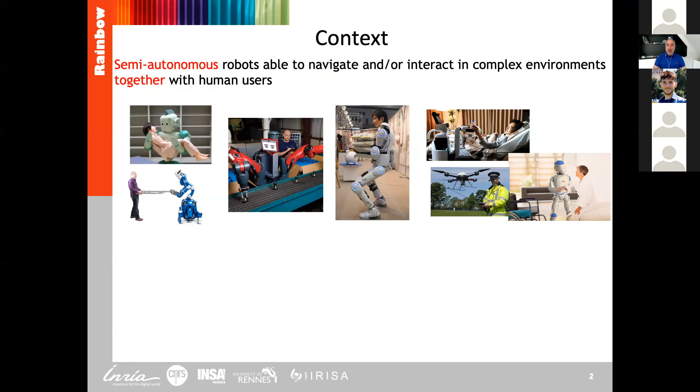So what I will talk about in this talk is a summary of the activities that we have been carrying on since, I would say, 10 years or so on the topics of shared control. So a little bit of context. So we want to have robots working together with humans for many reasons. So we can find really a lot of reasons if you want for why this is important. But for example, there are technological limitations.

So we all would like to have robots which are all capable and able to do everything on their own, but we are not there yet in many cases, as we all know. So we need the presence of human operators for helping in achieving a task in many situations which are not very well structured or predefined. Sometimes the robot needs to work together with a human because the task is such, for example, if they have to carry an object together.

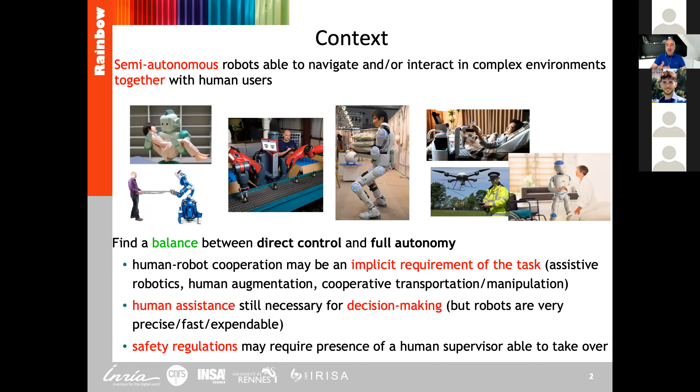Or also another point which is not considered every time, but I feel is still very important, is that there are many legal issues and safety regulations that prevent the use of autonomous robots all alone, for example, in public spaces. So you need to have a human supervisor there for controlling the situation. And so we could go on in this list, but because of all these reasons, it's important to study how to best interface humans with robots.

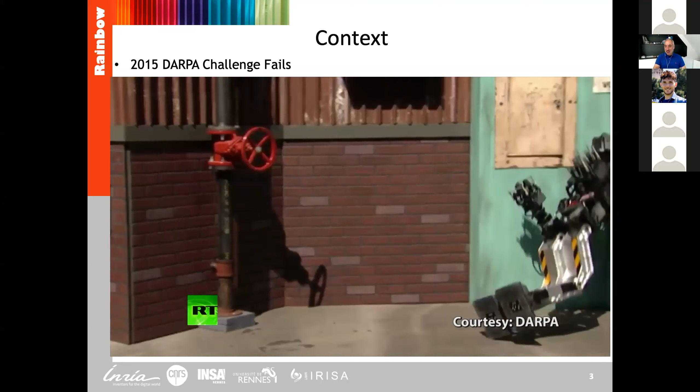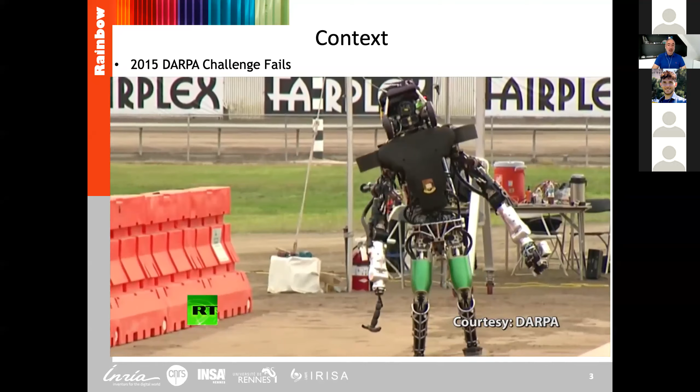And I guess everyone knows this video. So this is now a bit old, a 2015 video of fails of autonomous robots. Of course, this is a collection of the bad cases, but we can get a sense, at least in 2015, and I think that in 2020 the situation has not evolved so much from this time. Autonomy is not able to solve everything, especially in complex situations like humanoid robotics.

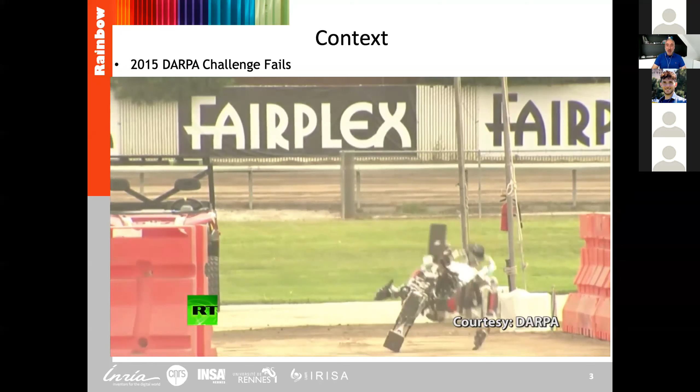And we try to place ourselves in the middle of this spectrum from, can you see the pointer of my mouse or not? Yes. Okay, yes. Okay, thanks.

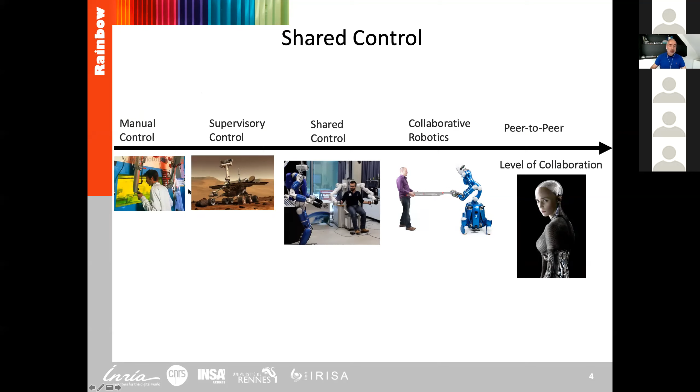So from manual control, in which an operator is in direct control of the robot. So for example, in this case, I think this is an example from the nuclear industry where an operator is controlling joint by joint a manipulator in the room. So we place ourselves in the middle. So the robot needs to have some autonomy because, of course, the operator cannot deal with everything by himself.

So a human operator can control, I don't know, maybe 2, 3, 4 degrees of freedom at most. We have some joysticks or devices, but then the mental load quickly becomes very, very heavy. So the robot needs to have autonomy for dealing with all the low-level aspects of the task that cannot be handled by the human operator. But the human operator is there and is controlling part of the task via a small set of degrees of freedom of inputs.

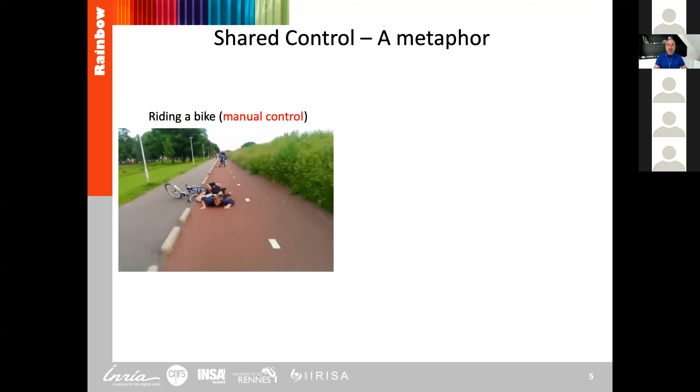Okay? So this is a metaphor that I didn't find myself. I picked this from a PhD student of mine, but I like it very much. So you can imagine manual control is like riding a bike. If you want to ride a bike, you have to be fully focused on riding the bike. Because if you try to do something else while you ride the bike, then the situation can become very, very bad very soon.

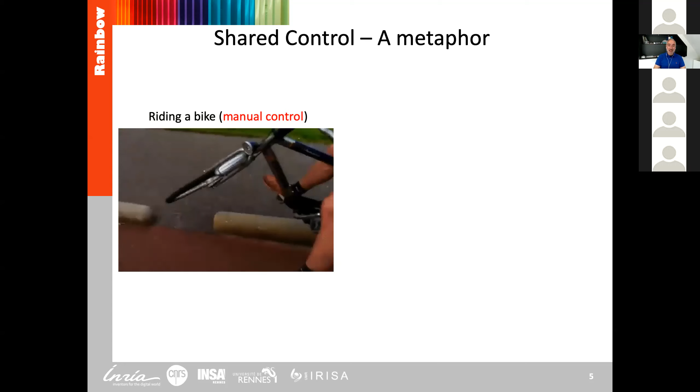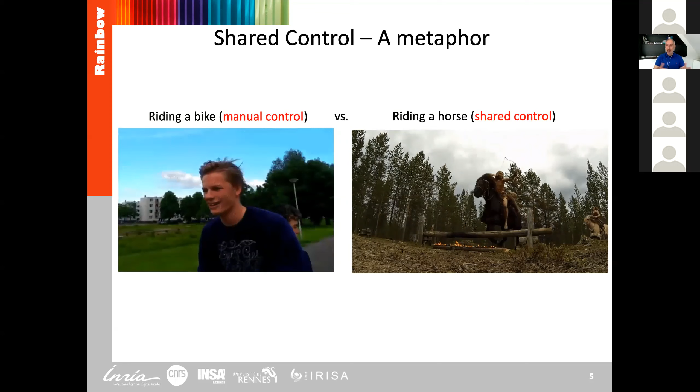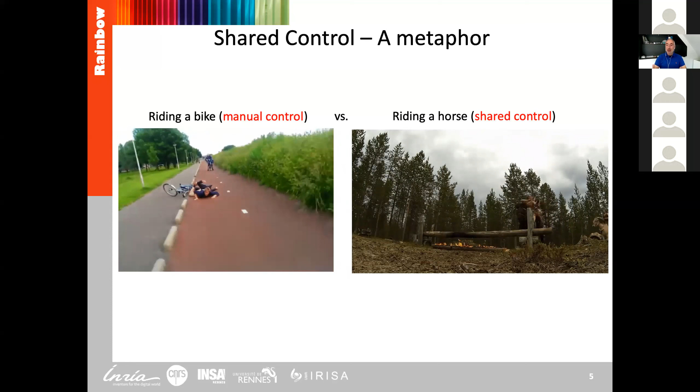While if you are riding a horse, the horse is a kind of shared control if you want, because a horse is a semi-autonomous system. So it's able to keep balance, to go along a predefined direction, to avoid obstacles, but then the operator is there and gives some kind of high-level commands via the reins. Okay? So we try to do the second example, of course.

So the main philosophy that we have been using in our work, which I think is shared by almost all of us, is to design forward and backward interfaces between the operator and the robot, which can be either singular or plural. So we can address either single robot or multiple robots.

So the forward interface is how to map few human commands to the many DoFs of the robots. And this is the part where, let's say, we engineers have to do some work. So how to find this mapping between maybe 2, 3 degrees of freedom and many, 10, 20 degrees of freedom of the robots under control is a problem. It's one of the challenges. So this part needs some work.

And then we also have the backward interface. So the robot is doing a task, and it has to inform the operator about what is going on. And so the operator typically is controlling the robot using a device and having some feedback, for example, visual feedback and force feedback, haptic feedback. These are the typical situations.

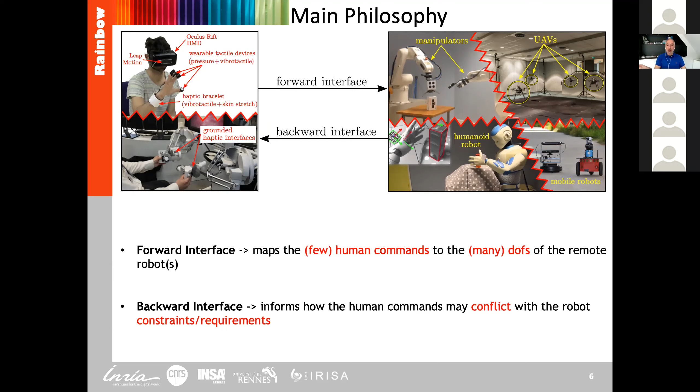And so the robot has many constraints. It's evolving in a complex environment, so it has to send back information to the operator, but again, this information has to be compressed somehow. It cannot inform about everything because the operator would very quickly lose sight of what's going on. So this backward interface is like the inverse mapping somehow of the forward interface. It has to compress what's happening to the robot to the few channels, to the few inputs available to the human operator.

So just a quick sketch. This is a generic sketch of how we approach this kind of problems. It's generic in the sense that in every situation, of course, this sketch will be adapted to the situation. So it has to be taken as a generic overview. So we have an input device, a master device. In general, we use force feedback devices. So we model the device as a typical second-order mechanical system with control torques and the human input forces.

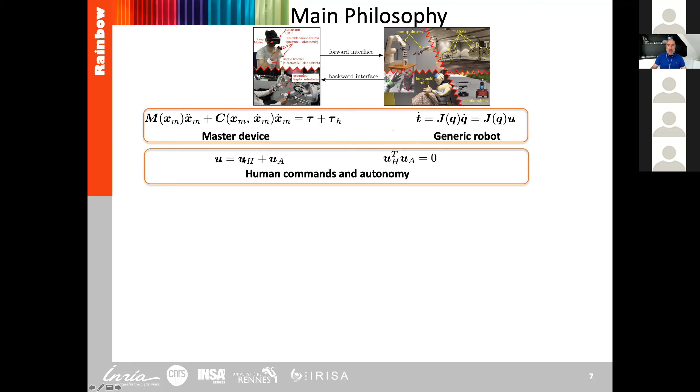And then the robot is a nonlinear system. So whatever, it's a generic nonlinear system. In this case, I modeled it as a first-order system, but you can also imagine it as a second-order system or more complex system. So the robot has some inputs, U, and these inputs are divided into a human command and an autonomous command, with some orthogonality properties among these two components. So we would like to have the human commands orthogonal to the autonomous commands according to some metric.

Now, in this example, the metric is just the Euclidean metric, but you can imagine using any kind of metric of interest. And this orthogonality is important because in general, we don't want to have the human commands interfering with autonomy and vice versa. Then a hard part in general in solving this kind of problems is to encode. So the robot has many constraints, many requirements. For example, the joint limits, singularities, obstacle avoidance, and requirements such as reaching a task, keeping balance, and so forth.

So all these kinds of constraints and requirements, in this way of approaching this problem, need to eventually become encoded into some kind of cost function. Now, this cost function in this plot is very simple, but in practice, this cost function can be arbitrarily complex. So a lot of work, a lot of engineering work goes into the design of this cost function, which can be very complex because the constraints or the requirements can be very complex.

Then once we have the cost function, another step that we engineers have to do is to design the forward interface. So how to map the few degrees of freedom on the haptic device, on the master device, to the human commands. And this mapping is done via this matrix QF, which is in general a rectangular high matrix. So few human commands xm or ẋm, depending on whether the human is controlling in position or velocity, and many robot commands UH.

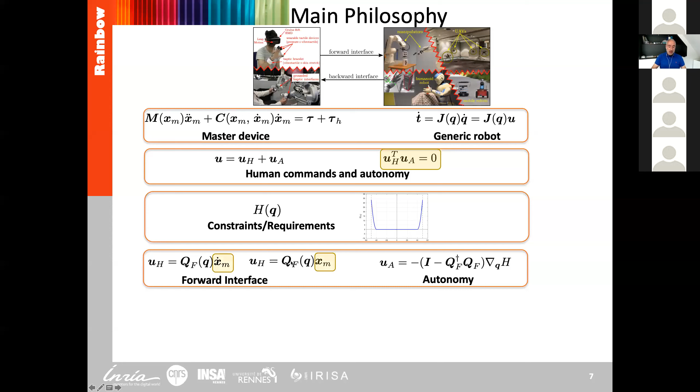Then once this is chosen, basically what the autonomy tries to do is to minimize the cost function H in the null space of this mapping. So this is the orthogonality property that I was talking about before. So the autonomy tries to do what it can for minimizing H while not interfering with what the human is commanding. Okay?

And then for the backward interface, basically the autonomy is optimizing H in the null space of the forward interface. And then there is one part left, of course, from this projection, the part which would be in the space of the forward interface, which is this part. This is basically how the autonomy would like to move the human commands for optimizing H. And this is given back as a force λ to the human operator.

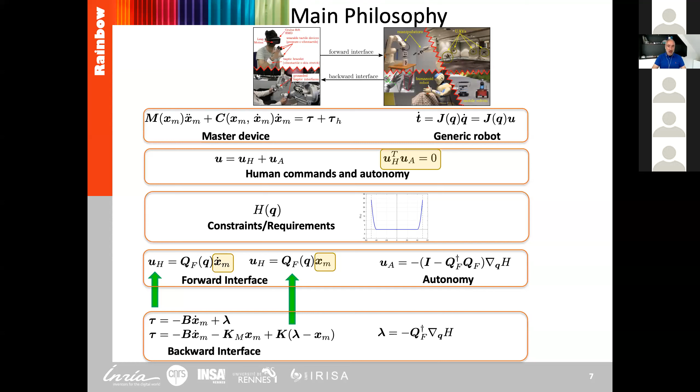Again, in this way, if the operator is controlling in velocity, or in this way, it's a spring if the operator is controlling in position. Okay? So this is a general sketch, again, of how we approach this kind of problems. Then we use these ideas in many different contexts: flying robots, single or multiple, and telemanipulation.

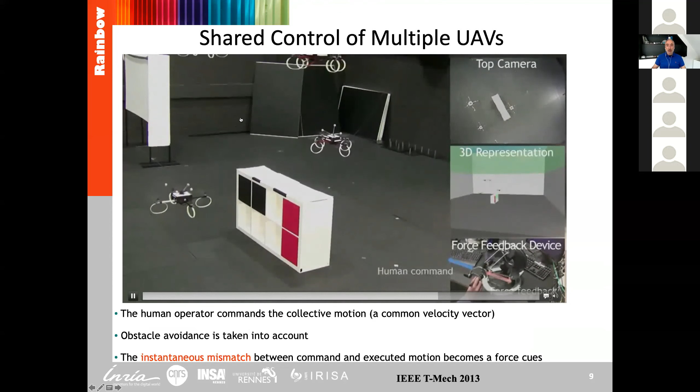So this is just a collection of some, by now, old videos about early works on this topic. In this case, an operator via a haptic device was controlling a group of robots that needed to keep a formation, a geometric formation, while avoiding obstacles. And the operator was commanding the velocity of the barycenter of the formation, and it was receiving a force which was basically representative of the repulsive action of the obstacle.

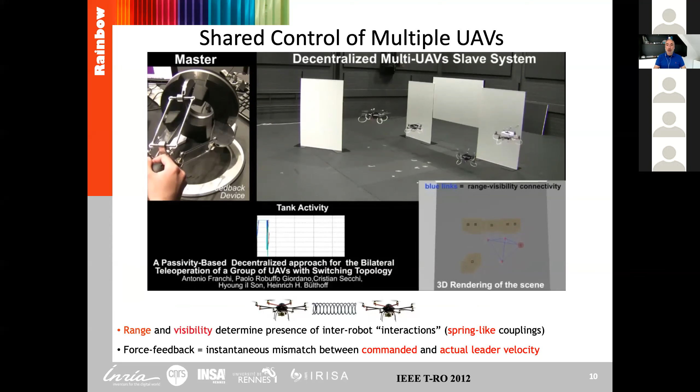In this case, the operator was controlling one leader robot, this one, while the other robots were following the leader robot via virtual spring-like couplings. And the operator was feeling basically a force proportional to the difference, the mismatch between the commanded velocity and the actual velocity of the leader. And the leader could have a velocity different from the commanded one because, for example, it could be dragged by the other robots which are following, or it could feel presence of the obstacles, so the repulsive action of the obstacles. We will also complexify this idea by encoding more complex constraints.

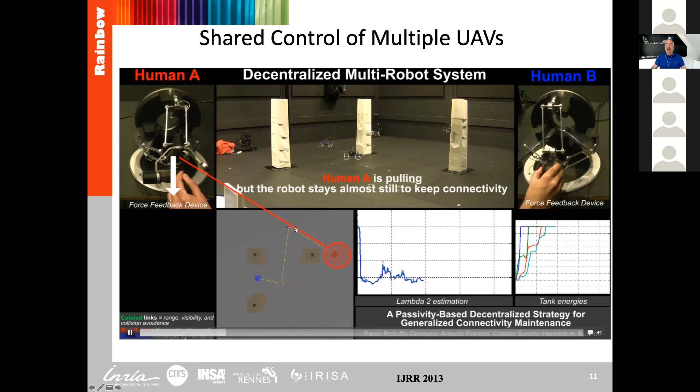So in this case, the situation is quite similar, but there is an additional constraint, which is a much more complicated constraint, if you want, that the group needs to keep connectivity of the graph at all times. So the graph can never become disconnected. So if the operator tries to move the leader in a direction, like in this case, where the graph would become disconnected, then the force feedback is informing him that this is not a good direction to move, and he should wait while the other robots reconfigure for not disconnecting the group.

And finally, we also use another approach that I like a lot, which is basically a trajectory-based shared control, if you want. So what happens in this case is that the operator is not controlling the instantaneous velocity of the robot, but the robot needs to follow a trajectory. So because of the task, the robot needs to, for example, cover an area and it has to follow a trajectory. And the operator can control some properties of this trajectory. In this case, for example, it can control the position of the barycenter, the planar orientation, and the expansion of the trajectory. And there are some constraints, obstacles.

For example, in this case, the robot needs to avoid obstacles. And the trajectory is modified by the robot, but ahead of time. So if there is an obstacle that could be hit, I don't know, in 5 seconds, the trajectory is autonomously modified by the robot in order to avoid the obstacle in 5 seconds. The nice point is that the operator receives a feedback, a force feedback, which is informative of what will happen in the future.

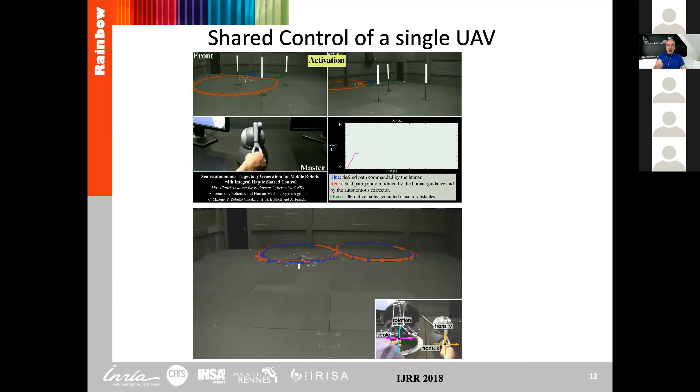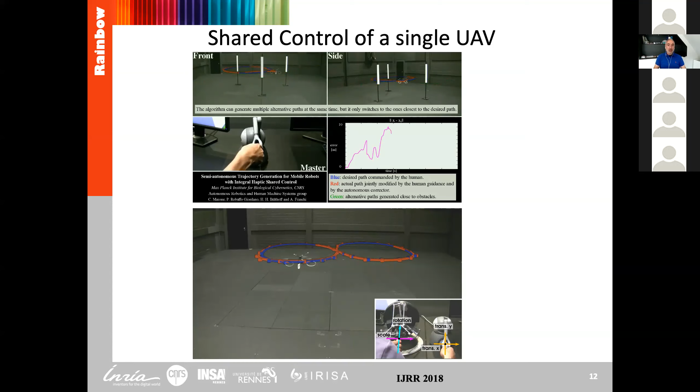So to explain it easily, if the operator tries to move the barycenter to the right, and moving to the right means that in 5 seconds the robot will hit an obstacle, then the force feedback tells the operator don't move to the right, because otherwise in 5 seconds the obstacle will be hit, and maybe it's better to move the path, I don't know, to the front or in another direction. So it's a kind of predictive force feedback, if you want, that informs about what will happen in the near future. And I think this approach has a lot of potential, especially for complex situations.

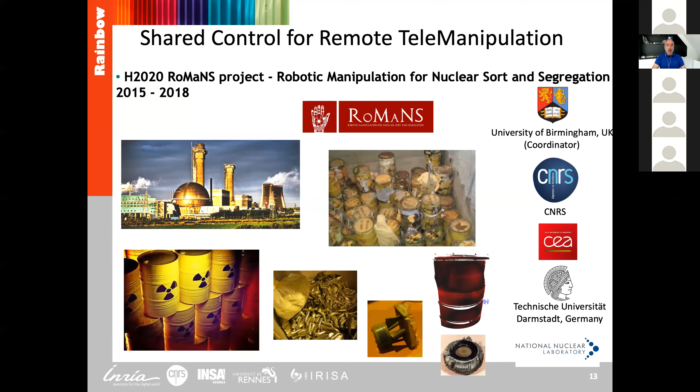So now, coming to more recent work, we worked a lot in the context of a European project, RoMaNS, in telemanipulation for sort and segregation of nuclear waste. So the idea is that sorting of nuclear waste is done mostly manually, in the sense an operator is manually controlling a robot for taking the waste and sorting it and manipulating it. And of course, one would like to automatize all this process. But automatizing is not so easy, because handling waste can be quite tricky.

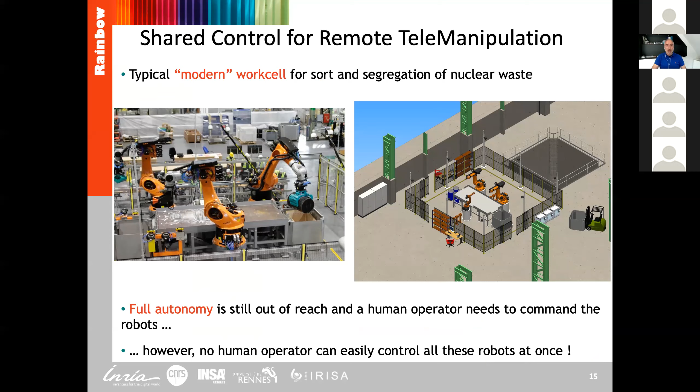So people in the industry would like to have human operators in the loop, especially expert operators who can control at high level these manipulators. So what we did in this context is to consider this kind of setup, which is representative of the setup which was really used by the industrial partner we had in the project.

So one manipulator is a gripper for manipulating, and another manipulator is there with a camera on board for looking at the gripper and at the object. And this information is needed for estimating the relative pose between the gripper and the object. And then this relative pose is needed by the algorithm for approaching the object and for manipulating.

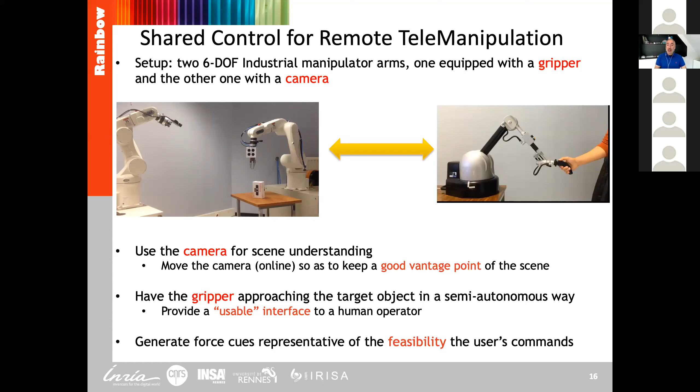Okay? So an operator, at least a standard operator, cannot control 2 manipulators at the same time, joint by joint. Of course, it's impossible. In this case, it would have to control 12 degrees of freedom. So we need to design some interfaces for letting the operator control easily this 2-arm system, and also providing, again, a force feedback informative of what's happening to this complex system made of 2 arms. There are joint limits of both arms, singularities of both arms, and you can complexify the situation as you want.

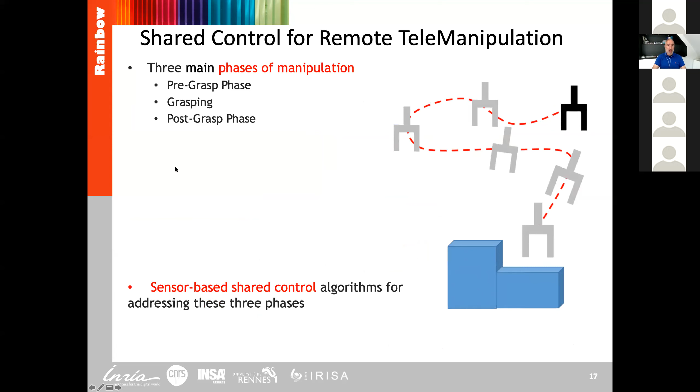So we addressed the 3 phases of the manipulation action: approaching the object, grasping, and then doing a post-grasp manipulation action. So now, some concrete examples of what we did. For example, one of the first attempts was to say, let's imagine that the gripper needs to approach the object, but it is constrained so as to always look at the object. So in general, you want to approach the object while looking at it by having the gripper main direction aligned with the direction going towards the object for grasping.

Then this constrains 2 degrees of freedom for the gripper. There are 4 degrees of freedom left, and these are controlled by the operator, but along an interface, which means basically along some predefined geometric primitives. So in practice, the operator can command the robot along these 4 degrees of freedom by moving over a sphere centered at the object, by approaching along the connecting line, or by rotating about the connecting line. So this, in our opinion, could give an easily understandable interface for an operator who is already expert in this kind of tasks. And the other robot, the robot with a camera, needs to move autonomously so as to always keep in the field of view the gripper and the object.

And the force cues, which are here at the bottom, are designed so as to, sorry, I forgot, we have system constraints as always, which are encoded in the cost function. In this case, the constraints were joint limits and singularities of both manipulators, the one with the gripper and the one with the camera. And the force cues were designed so as to inform the operator how to move, only along the 4 directions given to the operator, so approaching, moving along the sphere, and rotating, so as to minimize the cost function. So the system tells the operator how to move along this interface for staying away from the constraints, and the autonomy takes care of the rest.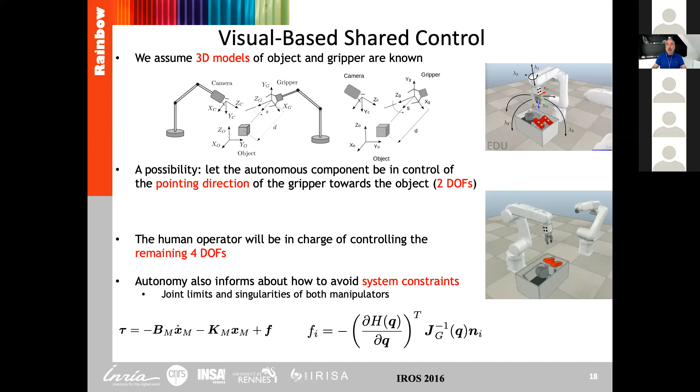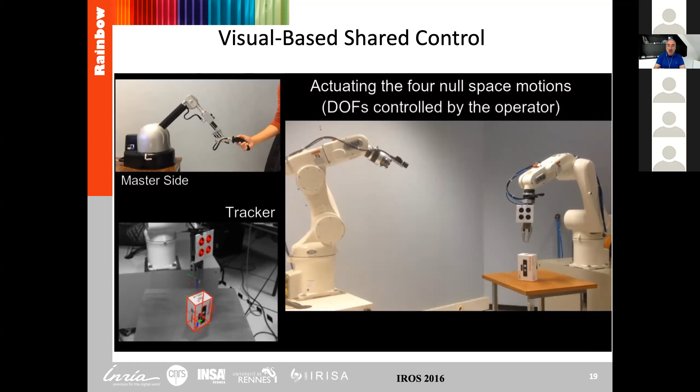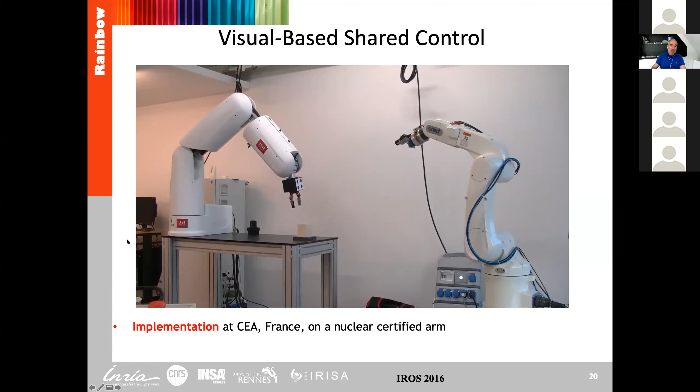So this is an example of the implementation. This is the camera view, where the robot with the camera is moving so as to keep the gripper and the object in the field of view. The operator is activating this interface for approaching the object or moving along a sphere while approaching the object for grasping. You cannot see it in the video, but it's also receiving force cues informing about the proximity of the constraints. And in the context of the project, we did an implementation also with a nuclear certified arm at CEA, showing that this technology could be ported also to this kind of arms.

Then another extension that we did was along the lines of the trajectory-based shared control that I talked about before in the context of the mobile robot. Imagine that there is a trajectory defined by some algorithm that defines how the gripper and the camera should move for approaching the object. The operator may be interested in controlling not the instantaneous velocity right now, but some properties of the trajectory ahead of time. For example, the final pose. The gripper may be here, and there is a trajectory that goes down to the object. The operator may just want to move the final pose of the trajectory, while the rest of the trajectory up to the final pose is optimized by the autonomy.

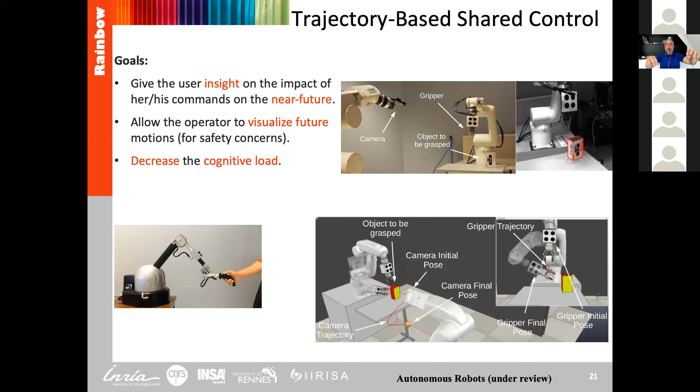And the same for the camera. The camera also has a trajectory that will tell the camera how to move while the gripper is approaching the object, for keeping everything in the field of view. And also the camera trajectory is optimized by the autonomy.

So without entering the details, which are a bit, let's say, convoluted, we define trajectories in terms of a parametric polynomial, in particular B-splines. And the operator was given access to some degrees of freedom on the final pose of the gripper, and both trajectories were optimized at the same time.

And in this case, we could also include a not so trivial, let's say, visual constraint that was imposing the camera to always move so as to keep the gripper and the object in the field of view, and also not occluding themselves. So by modeling the gripper and the object as spheres, we could include the constraint of not having an occlusion between the gripper and the object while the camera was moving.

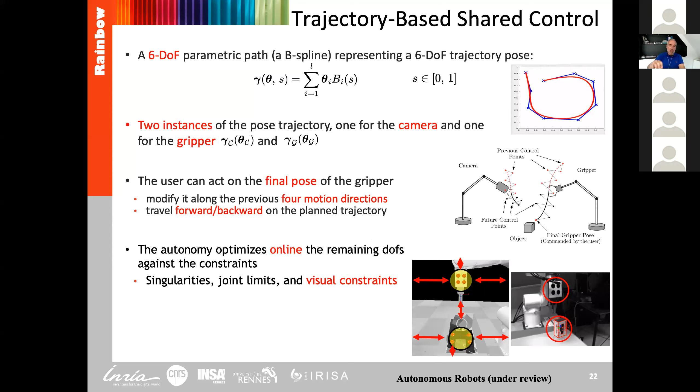And the operator was, again, receiving a force feedback informing about how to move the final pose of the trajectory so as to keep both trajectories far from the constraints during motion at all times.

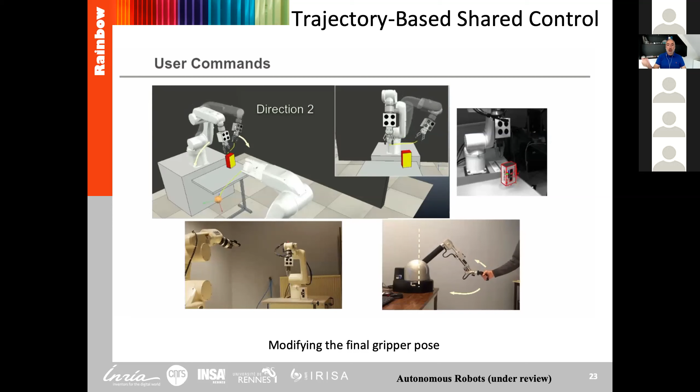All right, so since I guess I'm running late, I will try to go fast on this part.

So then another extension that we did, and again, this is an idea that I find quite interesting, is to address the post-grasp manipulation action. So the idea is quite simple. Imagine that you manage to grasp an object. Now, in general, you grasp because you want to do something. You don't grasp just for the sake of grasping. You grasp because then you want to do some action. You want to move the object from here to there, for example.

So imagine that the manipulator grasps an object, and then the trajectory that the object needs to follow after the grasp is given. So the object needs to go from here to there on the shelf, for example. So one degree of freedom which is left to be optimized, to be taken into account, is the grasp pose. So you may grasp the object like this. I don't know if I have an object here. I have my phone. So you can grasp it like this, or like this.

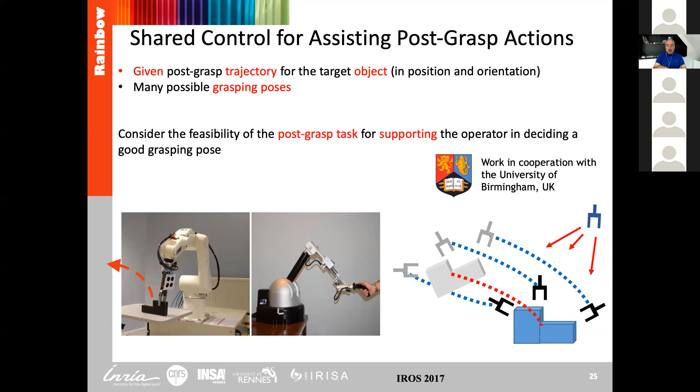But this grasp location makes a difference for then executing the post-grasp action. If I grasp the phone like this, then it's easy to move it like that. But if I grasp it like this, then it's kind of harder to move it like this. Yeah? So what we did was to, let's say, implement this idea into a shared control scenario.

So the idea is that the operator has a good way of judging if this or this or this is a good grasp because of its experience. But the operator has a hard way of judging whether this grasp or this grasp will lead to a good action for the robot. Because, for example, by grasping the object like this, the robot could not hit a joint limit while moving along the trajectory, while grasping the object like this, the robot could hit a joint limit. And of course, this is impossible to be judged in general, I would say, by any operator.

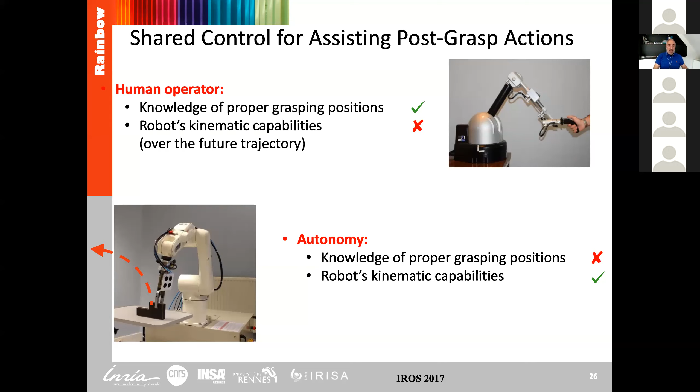So we blended these ideas, and what we did was to define some metric for judging whether a grasp is a good grasp. So the metric, apart from the details, at the end of the day, is the integral of the projection of the manipulability ellipsoid of the manipulator along the trajectory. Yeah? So basically we evaluate, if the robot grasps the object like this, the manipulability ellipsoid that will result from this grasp along the trajectory, and the integral of this ellipsoid will give a metric, a number, an answer.

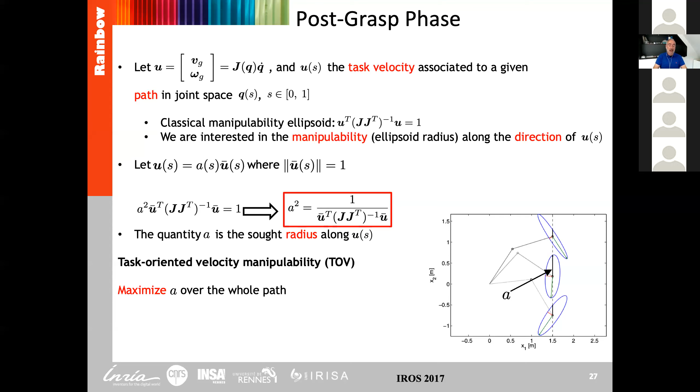And then this metric is what we want to maximize. We want to maximize the projection along the path of the manipulability ellipsoid. It's just a possible metric, of course. You can imagine any other metric of interest. And then once we have this metric, the integral of this projection along the path, the free variable which is left is where to grasp. Here, or there. So the grasp pose. And then the force cues can be built from the gradient of this cost function with respect to the grasp pose.

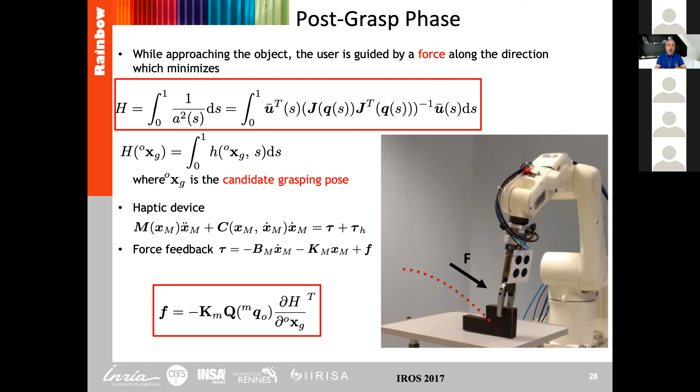So the force cues will tell the operator where to move, such that the resulting grasping pose will be good for the manipulative action. And this idea can be, again, complexified at will. For example, we are now preparing an extension that also includes the dynamics of the robot. So it's not only about kinematics, about manipulability, but it also includes the torque capabilities of the manipulator arm for torque-controlled robots, for taking into account the inertial mass of the object to be moved.

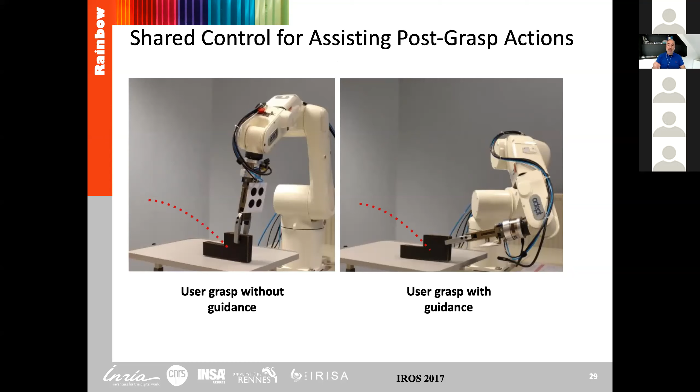And as an example, if the operator was told to grasp this object, he will grasp this object probably like this, for then moving it along the red line. But it turns out that grasping the object like this is bad for the robot, because by grasping the object like this and then moving the object along this trajectory, the robot passes very close to a singularity. While this is the best grasp for avoiding the singularity. And again, the decision on what grasp to choose is left to the operator. The operator decides, but is informed about which grasps are better or not for the manipulative action.

Then some other extension. For example, in this case, we explored learning for encoding expert demonstrations. So it's a simple idea, but quite effective, I think. You can imagine that you can have experts demonstrating many trials, many trajectories for approaching an object. And then you have a novice user, and the novice user needs to do the task. So one way to use learning in this context, at least the way that we thought was a good way, is to take the distribution generated by the expert operator.

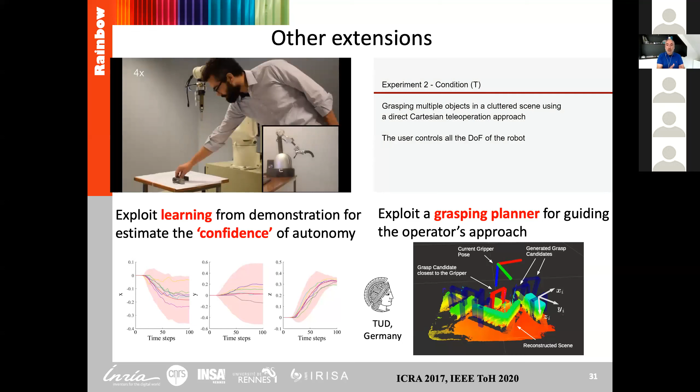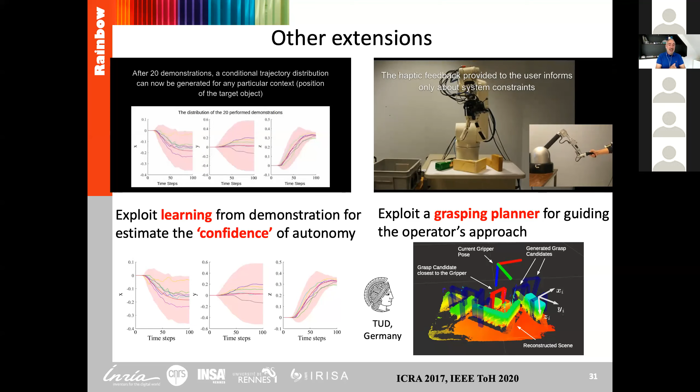Then this distribution will have a mean and a variance along the trajectory. Where the variance is small, this means that all the demonstrations of the expert operator were passing basically close to the mean. And this means that the force cues then need to be strong in this case, because the novice operator needs to do what the expert operator did. When the variance is large, this means that basically the operator didn't care, to some extent, about where the robot was. And this translates into the fact that the force cues can be set small for guiding the novice operator, because the novice operator has more freedom to choose where to be.

Yeah? And it's a simple idea again, but the results were quite nice, and I think it's a promising idea. In general, of course, as many of us are already doing, learning with shared control is a good direction, in my opinion, where to go next.

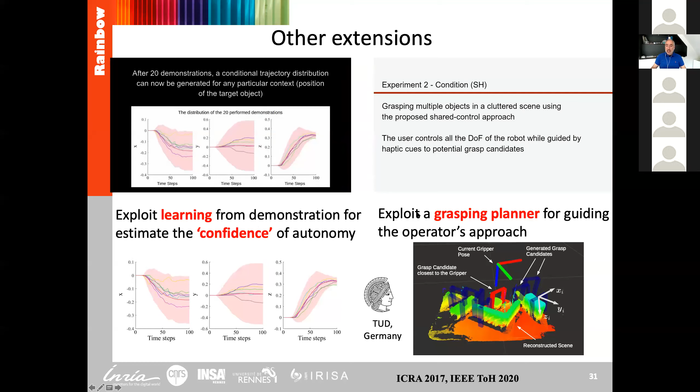Then another extension that we did was to embed the grasping planner into the picture. So if you want to grasp an object, you can rely on the human operator, but you can also exploit many of the existing grasping planners out there that are able to generate feasible grasps. And this can be used as a baseline for giving cues to the operator where to grasp. So the operator judges by himself, but is helped by the grasping poses generated by the grasping planner.

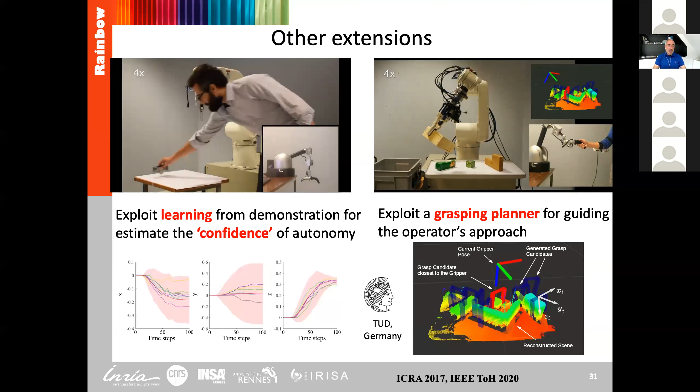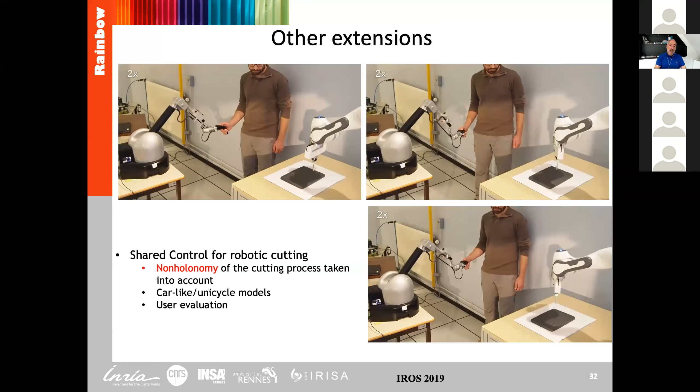And we addressed cutting. Cutting is a nice problem because it involves some kind of nonholonomic constraints, if you want. When you cut, you cannot move sideways, a little bit like a car or a unicycle. You may turn on the spot in some cases, or in other cases you cannot turn on the spot; you can just turn while moving, like a car. So it's a nice control problem for people from control. And without entering into details, we embedded these nonholonomic constraints, whether unicycle-like or car-like, into the shared control for guiding and assisting the user.

And we also considered, together with Mario Selvaggio, one of the organizers of the workshop, the case of having two manipulators, one of which is autonomously performing a task, in this case a vision task. So this manipulator with the camera needs to look at an object, while the other manipulator controlled by the operator has to grasp an object, and they have to share the workspace. So there is an issue of avoiding collisions between the manipulators. And also in this case, following basically the same guidelines as before, one could exploit redundancy for avoiding the collision. And when this is not possible, force cues can inform the operator how to move for avoiding the collisions.

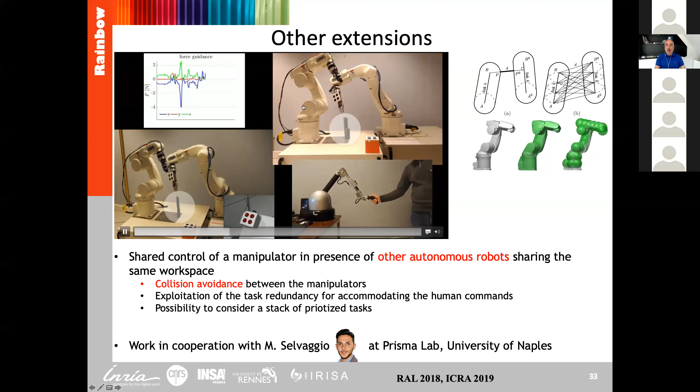And yes, last but not least, one of the PhD students under my supervision, who was also one of the main authors of these works, implemented this kind of ideas also on the Toro robot during a visit at DLR. And the idea here was that the robot needs to keep balance, and the operator is controlling one of the hands for reaching a point in space, and the rest, the autonomy takes care of the balance, and for example uses the other hand and the rest of the body for keeping balance.

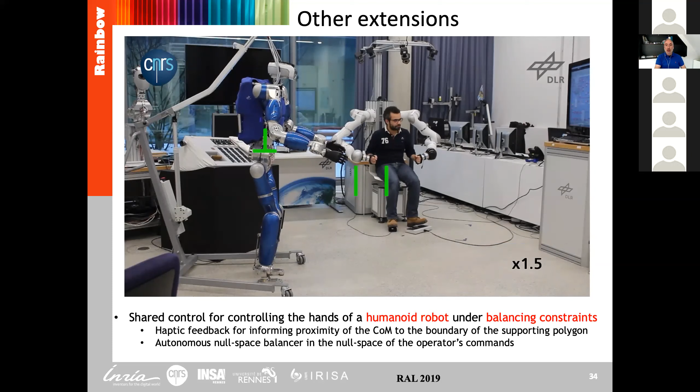And the force cues are telling the operator where to move the hands for keeping balance in case this is not possible or not easily achieved by the autonomy. And yes, we did also a live demonstration at the Maker Faire in Rome in 2018. That's always a nice experience because, as we all know, doing a demonstration in a lab is one story, but doing a demonstration in a public space with general public is a different experience. You get a lot of questions that you would not expect, but the feedback we got was nice.

And concluding, of course, we will need shared control in the future. I cannot see anything different from this. Autonomy will improve, but the human will have to be there for many reasons. Not just because autonomy is not able to solve the task, but also for safety and responsibility reasons. And we have to advance in this field. In my opinion, there are many advancements to be done from the control algorithmic point of view.

But I think a blending with learning is needed, because for encoding the human intentions, for encoding a human who will solve a problem, we have to use statistical learning, I think, and then blending with control, of course. So this is the direction that I'm trying to work on now, and I think it's a promising direction for the future.